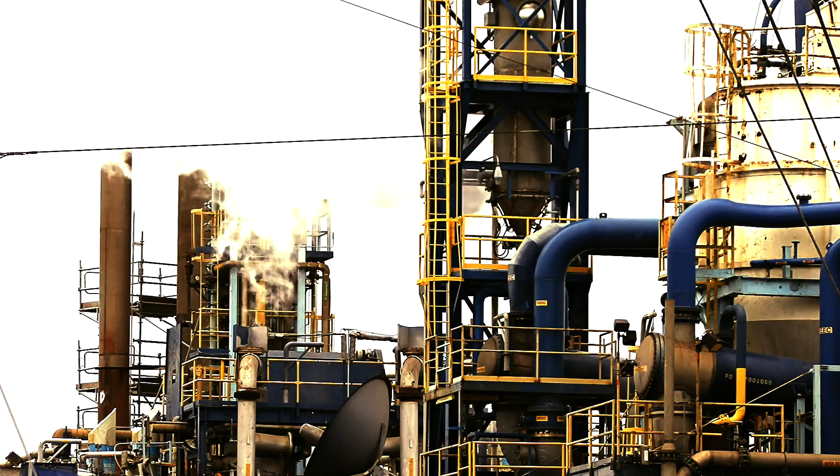As populations grow and areas become urbanized, more and more people, communities, and businesses need and demand clean, safe water. Often, the supply of water cannot cope with the growing demand. This leads to water shortages and uneven distribution throughout the country. Likewise, improper waste disposal and untreated wastewater discharge pollutes water bodies and reduces the availability of clean water.

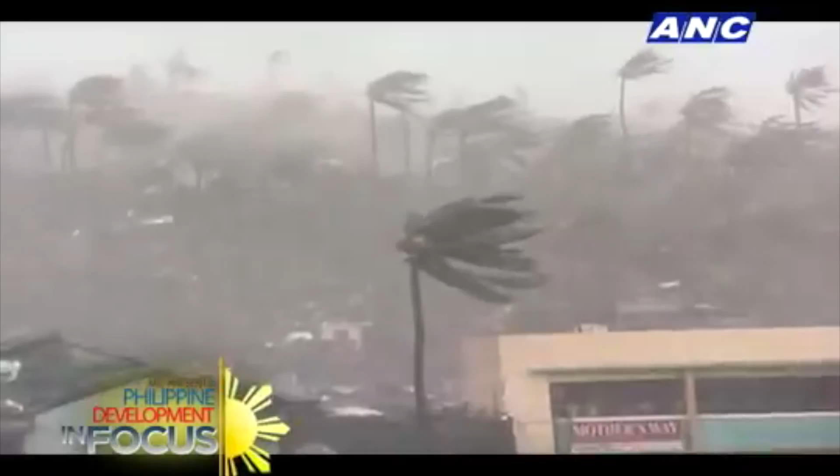While excess water from increased rainfall brought on by extreme weather events should ideally be stored for later use, especially during the dry season, this opportunity for maximum use of the resource is not optimized. Instead, extreme rainfall has resulted in repeated flooding and widespread damage, translating in economic losses and loss of life.

The glaring truth is that we are left with no choice but to face these challenges head-on, and, like ripples on the water's surface, create lasting and far-reaching solutions. The Philippine Development Plan, or PDP, the nation's blueprint for achieving inclusive growth and poverty reduction, includes strategies in pursuit of water security.

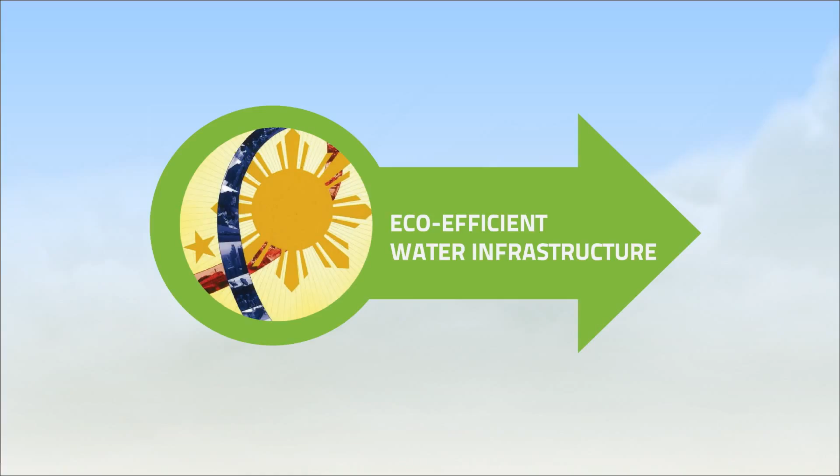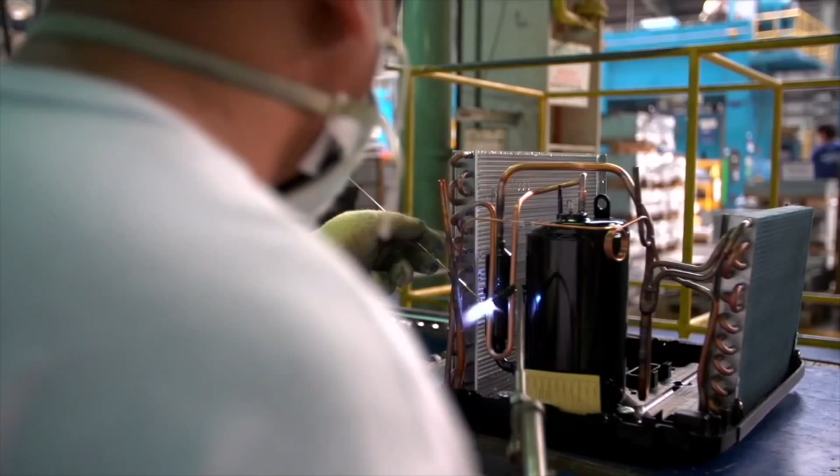An overarching strategy of the PDP towards ensuring water security is the use of eco-efficient approaches and interventions to enable the Philippines to use its water resources in the most economically efficient and environment-friendly way. This is seen to ultimately help enhance the country's competitiveness and increase productivity in the industry and agriculture sectors. Through innovative interventions and technologies, the eco-efficient approach can also be a major strategy in dealing with the challenges of climate change and disaster risks for sustained economic growth and poverty reduction.

Certain sectors have already risen to the call. Various projects of the public and the private sectors have been developed to address water problems, both the shortage of water and excess water during time of heavy rainfall. Local communities and the private sector have also built wastewater treatment facilities in urban and industrial communities in order to reuse dirty water and to ensure water quality.

To protect flood-prone areas, especially during the typhoon season, flood management structures such as permeable surfaces and catch basins are being built. However, in order to optimize water as a resource, these floodwater catchments would need to put in place facilities to enable the reuse of water.

To integrate the eco-efficiency concept into water resources development and management, the National Economic and Development Authority, with the assistance of the United Nations Economic and Social Commission for Asia and the Pacific, formulated the Eco-Efficient Water Infrastructure, or EEWIN, Strategic Roadmap. Applying the concept of eco-efficiency means maximizing the efficiency of water resources within the ecosystem through innovative infrastructure and systems.

Eco-efficiency combines economic development and environmental quality through sustainable processes of design, construction, operation, and maintenance with less environmental and cost impacts. Simply put, EEWIN provides integrated long-term solutions that create all-around higher value with less impact on the environment.

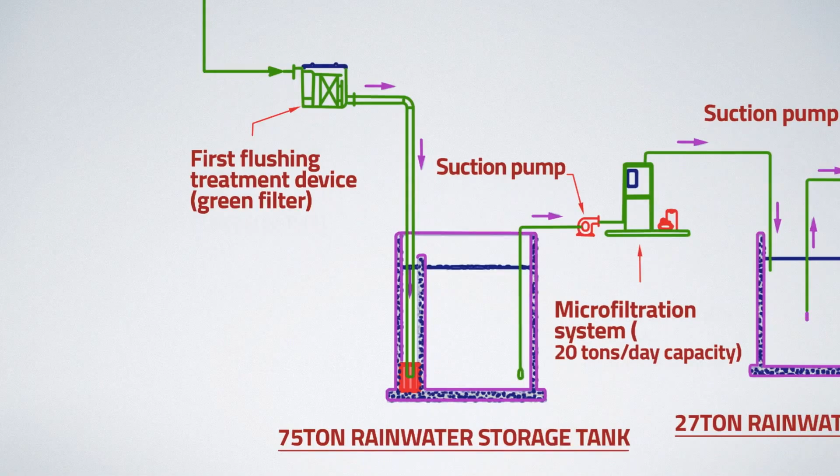One of the simplest innovations to boost water supply is rainwater harvesting. This involves collecting water from surfaces on which rain falls and storing it for later use. This is ideal and achievable for use in flushing toilets and irrigation, such as that successfully installed in the Philippine Science High School campus in Cebu.

In Nuvali, the country's largest self-sustainable and eco-friendly community found in Santa Rosa, Laguna, the usual concrete or asphalt pavements have been replaced with permeable surfacing. The porous material allows stormwater to seep in to prevent flooding and recharge the groundwater aquifer. Founded on its vision of sustainable living, this master-planned community in Santa Rosa, Laguna integrates technologies that work together to create an ideal and greener environment.

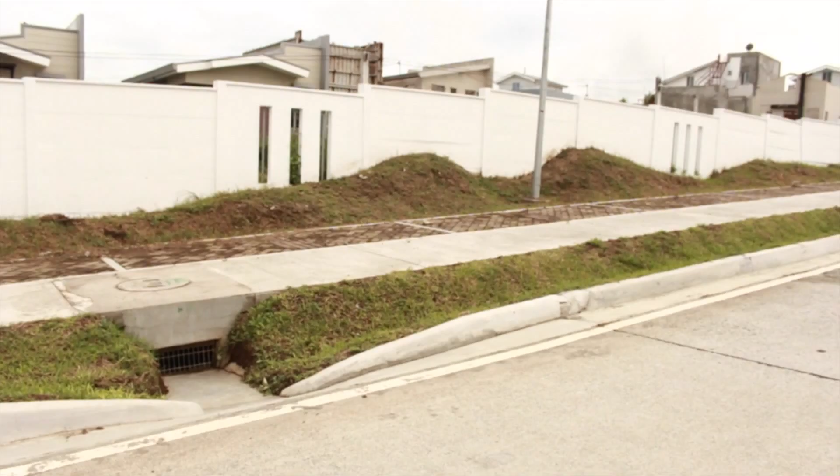Bioswales are landscape elements or linear rain gardens designed to receive, absorb, and filter stormwater from driveways, sidewalks, parking lots, and rooftops. Artificial lakes serve as catch basins of filtered runoff, while providing pleasant views and recreational features for residents.

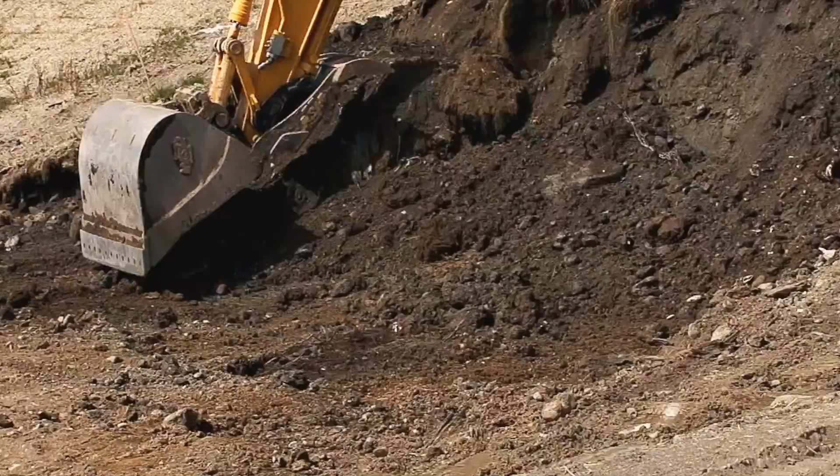In the agriculture sector, small farm reservoirs provide farmers with a low-cost way of providing extra water for a single farm, especially during the dry season. A reservoir can be as small as 300 square meters or as large as 2,000 square meters. Water impounding dam structures collect rainfall and runoff and can be constructed by manual digging or basic equipment. Irrigation is done through PVC siphon pipes or pumps.

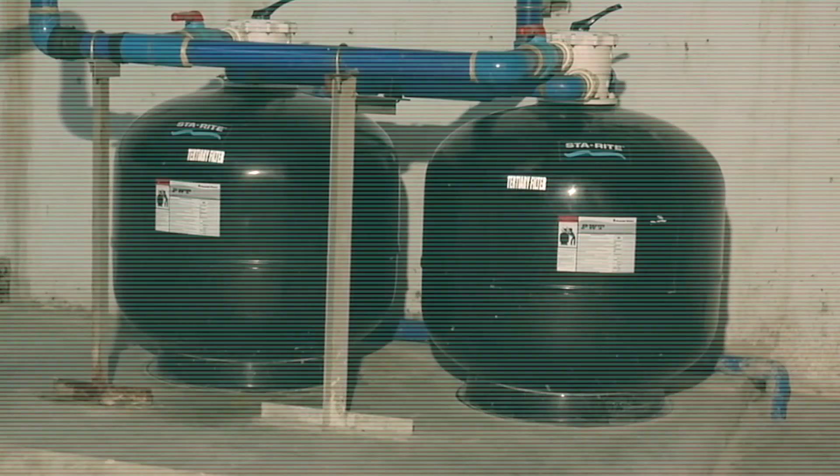All SM malls have wastewater treatment facilities using sequencing batch reactor technology. This takes up less space and uses less energy than conventional systems, since all processes take place in a single batch reactor or tank in a timed sequence.

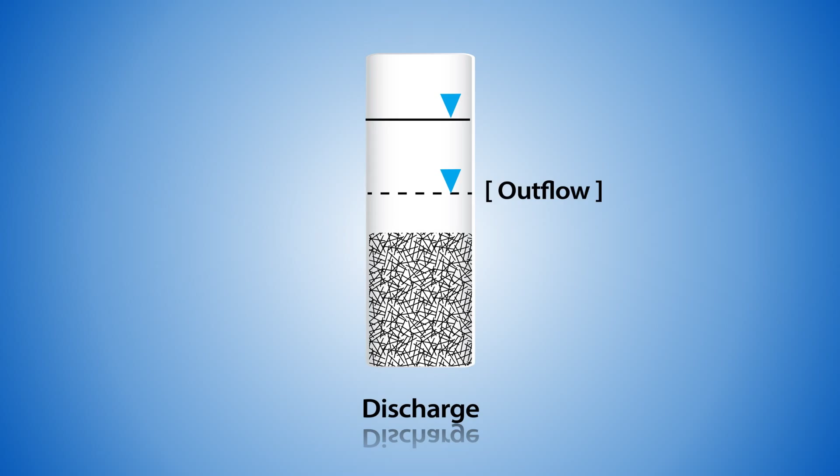Oxygen is initially bubbled through the wastewater to encourage the growth of aerobic bacteria that clump together in groups known as flocs or sludge as they consume the organic pollution. After a time, the sludge is allowed to settle to the bottom of the tank. Without disturbing the sludge, water near the surface is then released or discharged for reuse in irrigation, gardening, and other non-potable purposes.

The Muntinlupa Public Market Wastewater Treatment Facility utilizes a hybrid technology consisting of SBR and anaerobic baffled reactor or ABR technologies that are low cost and low maintenance. Construction cost of the facility is only a third of conventional treatment plants, while operational and maintenance costs amount to only half of conventional plants.

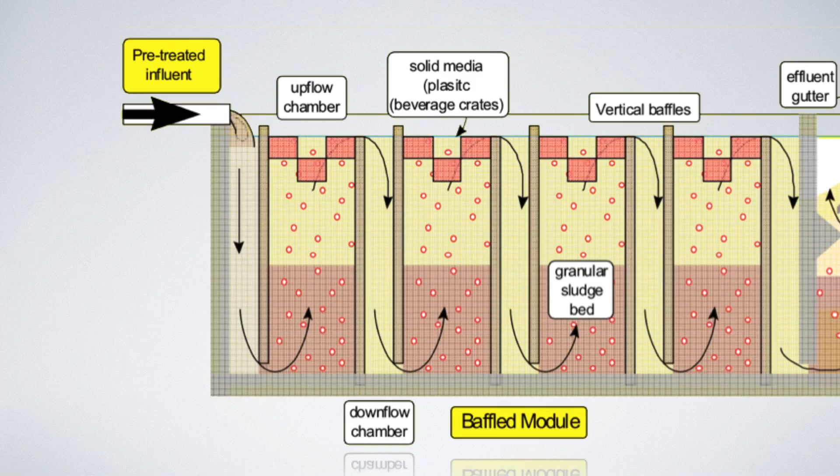Since the facility was completed in 2006 at a cost of 6.8 million pesos by the local government of Muntinlupa, with technical expertise provided by USAID and financial advice by the Planning and Development Collaborative International Incorporated, water pollution has dropped dramatically from 600 milligrams per liter to less than 30 milligrams per liter. The city has also been saving more than 15,000 pesos monthly on water reuse. With this hybrid technology, a maximum capacity of 210 cubic meters of wastewater coming from the market each day is treated.

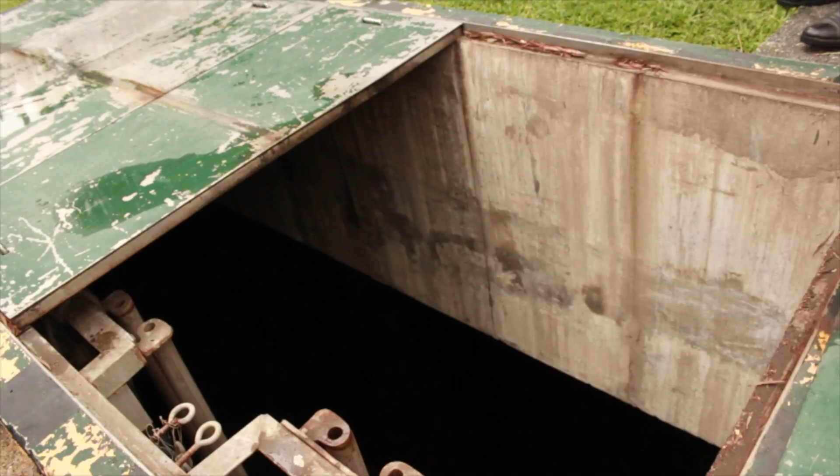To protect Bonifacio Global City against torrential rains and floods, its flood catchment basin located underneath Burgos Circle gathers runoff in the area into a detention tank 5 floors deep. The water is later pumped into creeks that lead to Manila Bay.

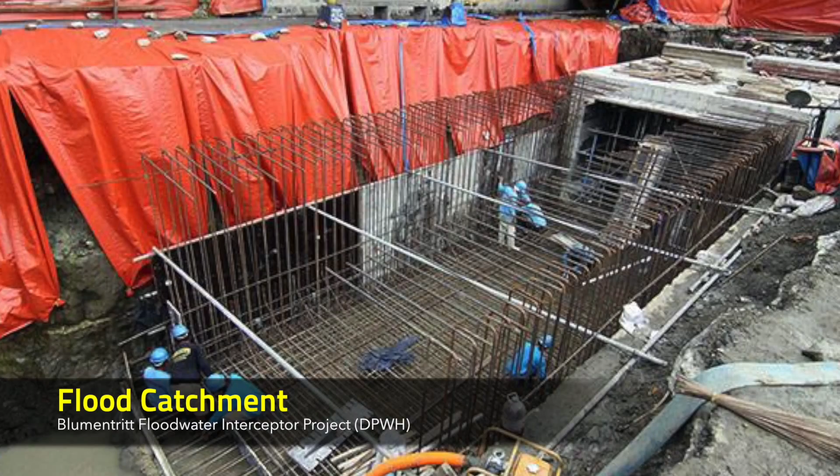The Blumentritt Floodwater Interceptor project is currently being built by the DPWH to manage flooding, especially in the flood-prone areas of UST and in Quezon City. The 3.3-kilometer-long and 2-meter-deep culvert is more than 50% complete. When finished, it will divert flood water from Quezon City that goes to the Sampaloc area in Manila, draining it towards Manila Bay. In future flood management projects, the reuse of stormwaters may be explored to optimize the use of the resource.

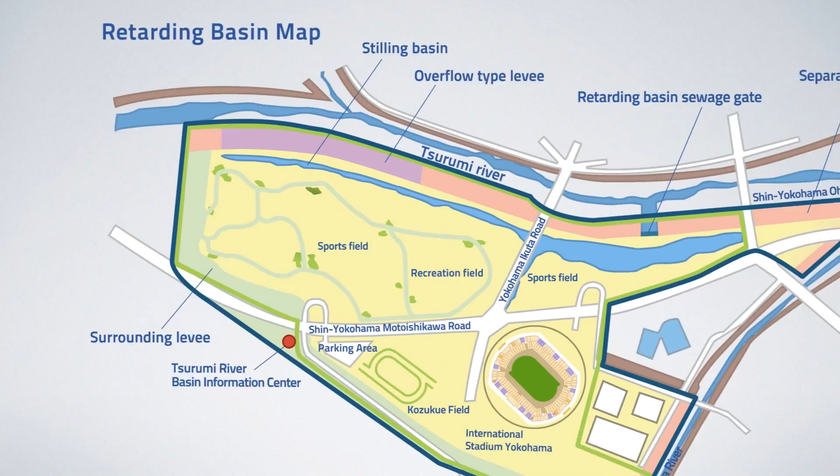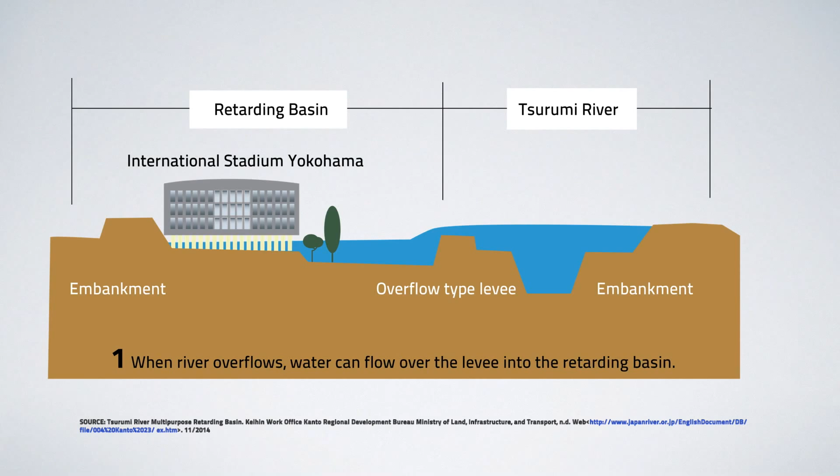In Japan, flood control has been integrated seamlessly into community life and infrastructure. The Tsurumi Multi-Purpose Retarding Basin, in addition to its primary purpose of protecting its populace from flooding, features a wide-open space used for recreation fields, sports facilities, venues for competitive events, as well as a lush natural park for local residents. The area covers 84 hectares with a storage capacity of 3.9 million cubic meters.

Even as water flows into the basin, an elevated main road connects all sides and can be used even during flooding. Devices and display boards are also installed within the basin to detect and warn people about dangerous situations during floods.

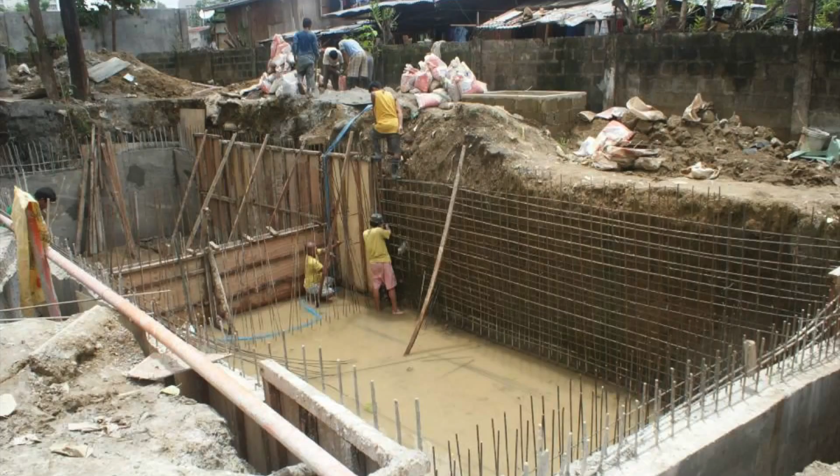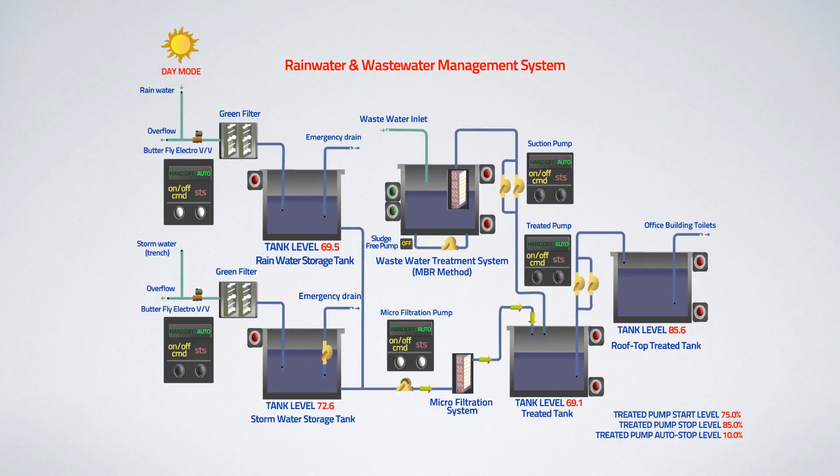The Integrated Stormwater Management or ISWM project under the Department of Science and Technology Region 7 is a comprehensive system that combines a catch basin, flood prevention, and water treatment facilities. The ISWM is integrated in DOST 7's S&T complex in Lahug, Cebu City. With a total investment cost of roughly 2 million pesos in 2010, the whole system is low maintenance yet high efficiency.

Aside from control of stormwater damage, long-term benefits and savings come from reduced construction of water supply facilities, reduction of unnecessary investment in overlapping infrastructures, reduced water and energy demands, and health services. With all these successful examples of eco-efficient water infrastructure, it is indeed time for us to take a broader perspective and work together to reassess how we see development and welcome innovation in our planning and design processes.

EEWIN is a strategic approach to sustainable development and proves that economic growth and environmental quality can go hand in hand. EEWIN is also consistent with the concept of value engineering or value analysis, which aims to optimize resources and investments, reduce life cycle costs, and expand the functionality of a project without compromising its intended objectives. In simple terms, eco-efficiency is about being able to do more with less, better value at lower cost and environmental impact.

EEWIN requires not just smarter but wiser decisions, working together through partnerships, legislation, investments, education, and other means to secure water sustainability and sufficiency. But the time to act is now. Time to win the battle against water resource challenges. Time for EEWIN.